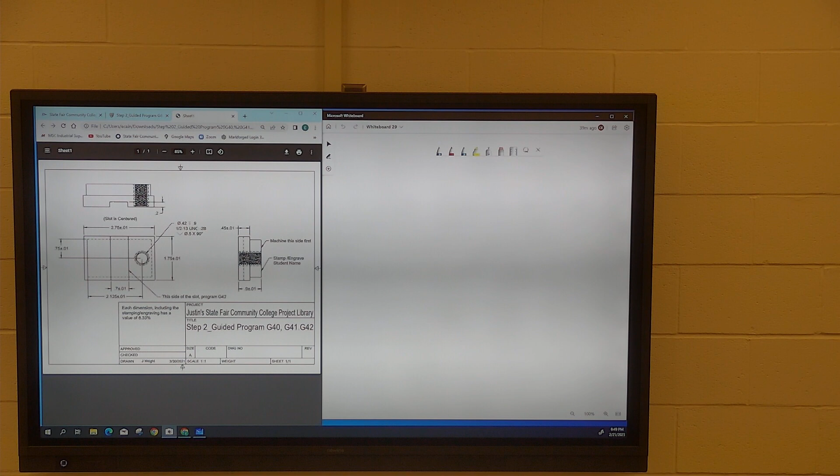Thing that I missed last time. It also helps if you don't teach us on Thursday too. Yeah, that gives me all weekend though. To an extent, yes and no. Yeah, but we also have the fact that everybody's tired by Thursday. Right, we're like, we let it go. No, I understand that too. I actually get that. I totally understand the fact of that.

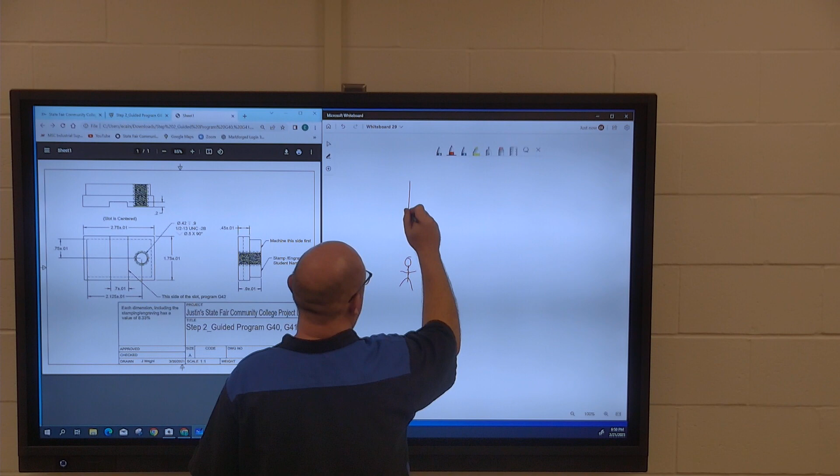So now, remember my little stick person? Let's draw it in here. So if you have your little stick person back here, and you had half of the diameter to that. I don't remember your stick person. So I said the cutter is always traveling away from the operator when you decide if you're in G41 or G42. So this is the operator, the little stick person.

Think of it as a little dynamic thing. And this cutter is on this side. So which one's which? Which code is which? We have G41 and G42. We just did G41, so you gotta know which one looks like G41. They both have arrows pointing in the same direction, though. Yeah, one's on the left, one's on the right. It's more which side of the line.

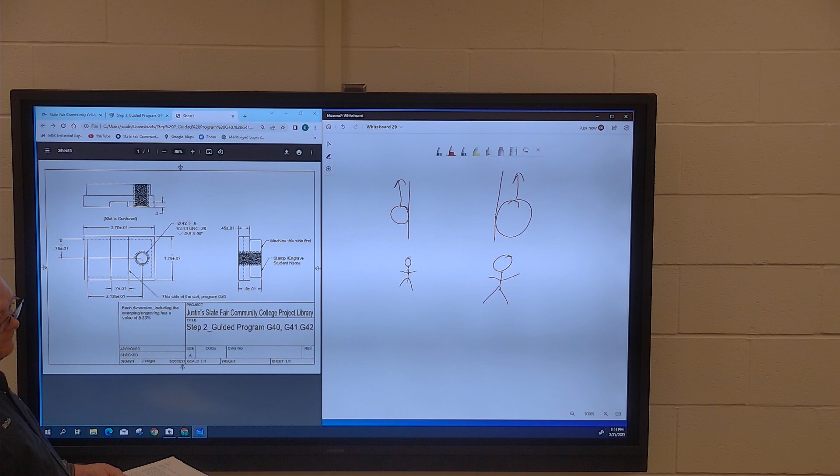You think 41 is on the left? He just said this was 41 and this was 42, is my guess. He actually guessed right. Because it looks like what we just ran. 41, it's more like you're looking at your life, and you hit 42, you're like, oh man, about to hit 50. That's how I'm gonna remember. I don't know how that picks up which side of the line you're on, unless it's because I drew the circles bigger here? How about now?

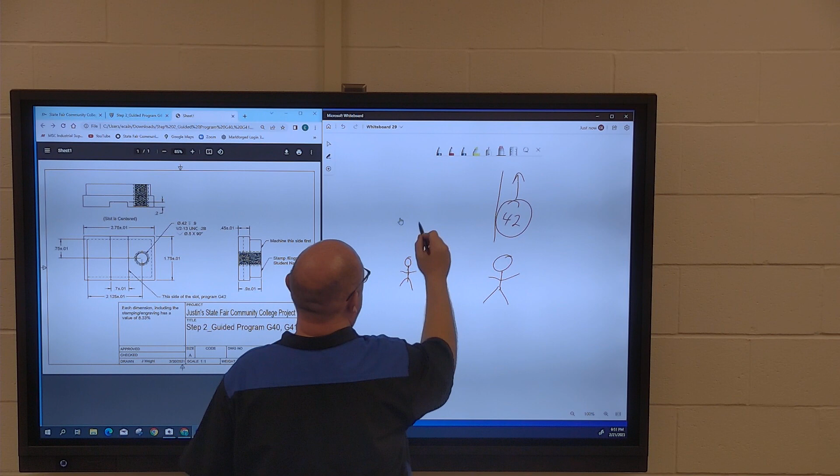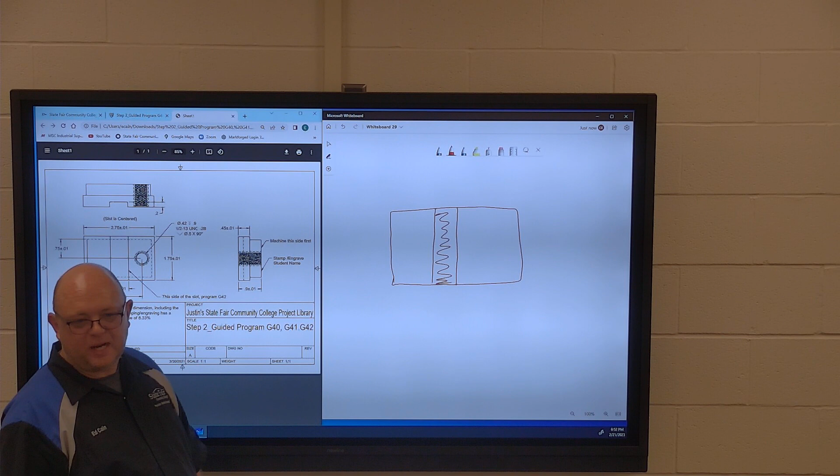And his life just blew up. Yet people at work think I'm unapproachable. Can you believe that? You got written up for that now? Not yet. I've been trying. I heard you say that 3 times now. Unfortunately, people keep trying to approach me. I've had the same thing said about me, Josh. Problem I ran into is, I can figure out the right answer to the problem faster than anyone else. He's just gonna write it down.

So, I want to cut this center part out. Your print says this is supposed to be G42. The whole concept behind this is to teach you guys the difference between 41 and 42. You hardly ever use G42. If you're cutting G42, it's usually conventional. So which one do you want to cut first? Let's see if you guys remember the last class, because this is a trick question, sort of.

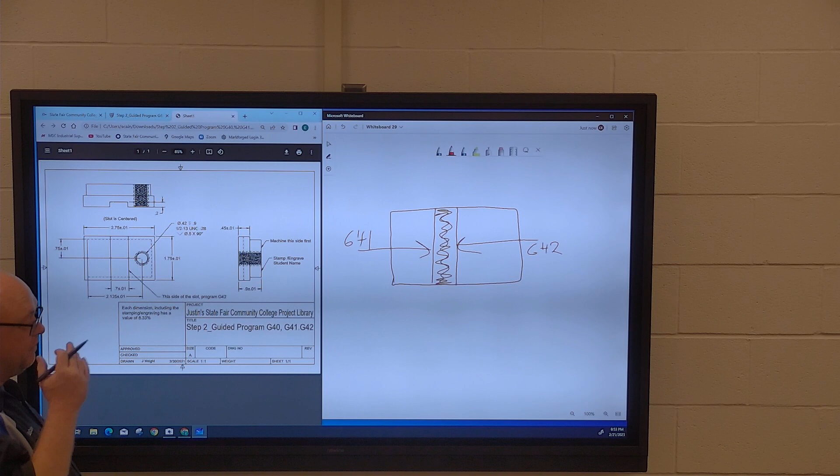Our print says to do it in G42 on one side, and the other side's supposed to be G41. So, I don't care which one we do first, how are we going to do it? I don't care about dimensions, because you've got to start your cutter off and you've got to shut it off. But we can't do a Z move, so unless you stay down and go all the way around, you're going to have to pick up and go back.

Right. So do you remember from last class what I told you to do and not to do? So if I want to start this in a G41, for the little stick person I just drew, I want my cutter on this side. You wanna come down to where your cutter is now and then go up. If you look at G41 in your book, and your little person's down here, your G41 shows like this, because it's on the left side of the line. But I want my cutter to be like this, and I want to cut in G41, so what do I do?

So if you're at the bottom, it's on the right-hand side. What if I start at the top? Will it be on the right-hand side or the left-hand side? It'll be on the right side of the line, right? Right. So if you start up here and you're going this way, according to G41, travel this way, cutter on the left. Seems like you're up there looking down at it.

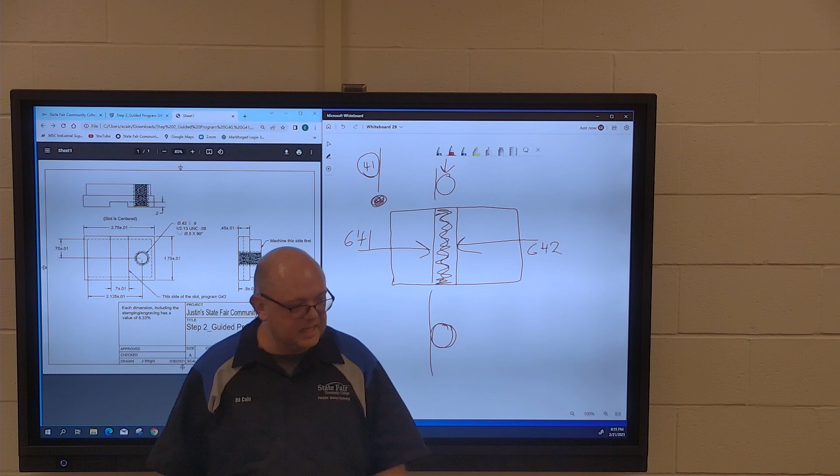Right. So this is what we want to do. We want to do a G41 from up here. And we'll do this. So we have to step in to our cutter, to our line. So we're going to do something like this, and then we're going to come down like this, and then we're going to come back out. Right.

So now how are we going to do the G42 over here? If you had your cutter, we want our cutter on this side of the line. Where are we going to start to get our cutter on that side of the line? You want to start at the bottom where you drew that and go up, right? But G42 is like this. On here, it says right side of the line, right? Does that look like that?

So you want to start at the top, or go back up? You want to pick up, run it Z positive, and go back up over your part, and then come back down? So you want to go like this. Right. Okay, I see what you're saying. So this right here is your G42. The first pass, you go there. And this over here is your G41. This will be your start point.

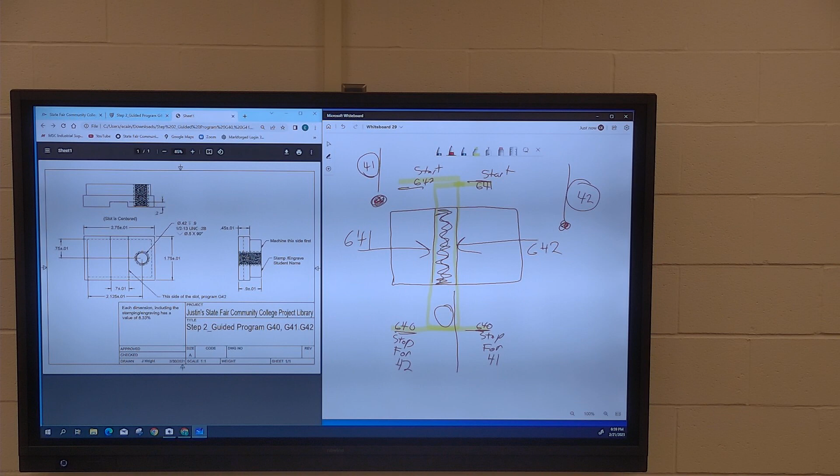So now we know that's what we want to do. So sketch it on a piece of paper, keep it in your brain, because I've got to erase that. Or I'll just roll it up and we'll go on. So now we've got all of our lines laid out. We know what we want to do. So now we're just going to go get dimensions off the print to do that, okay? I'll just scroll this one up, because I didn't screenshot this one. And now, here we go.

So, I have my drawing like this. I have my slot somewhere in here. That's what we want to do. We set our G41 that's going to start up here, come over, go down, come off the part, and come back over here, right? Correct. So the first thing I want to know is, from my 0, 0, where is this? X 0, Y 0 is in the middle.

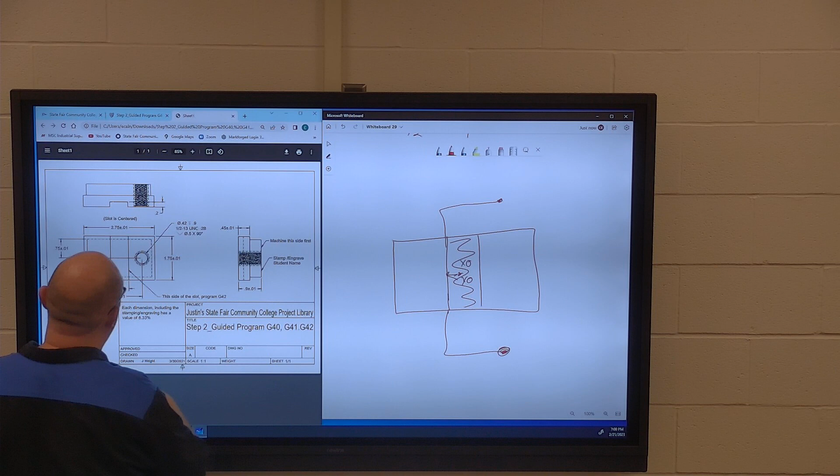So it should be 0.75. No, it should be 0.7, so that slot is 0.35. Is it slot center? So if it's slot center, where's my 0, 0? 0.35. My 0, 0, Josh is right, my 0, 0 is right in the slot. So if the slot's 0.7 wide, then that means I've got 0.350 on both sides. Understand?

So my X right here is going to be what? Negative 350. And my X over here is going to be 350, right? So now all we got to do is worry about how far off we want to be when we make our little target, and then our Y. So if we have a 3/4 inch end mill, technically we only have to be like 800 thousandths off. And I can show you guys how to prove this.

So our part is... And you don't want to do that with a 3/4 inch. No, we use a 1/2 inch for this. You're right, it's a 1/2, because otherwise it's going to cut it way big. 3/4 of an inch. Yeah. Yes, we did a 1/2 inch on this one, that's right. Thank you. So now our dimension is 1.75 from here to here. Is that right? Mhm.

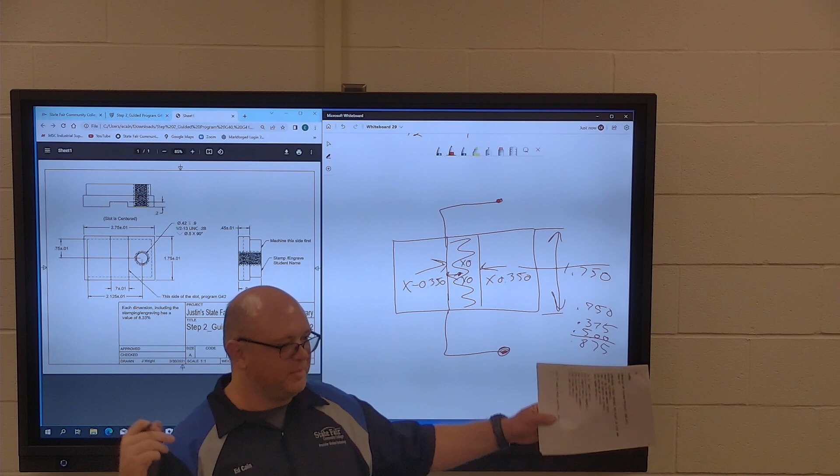I mean, it's like when my wife says something's on sale for $20 and it's 10% off. Or say it's 5% off, that's a better example. So what's the fastest way to figure out what 5% of $20 is? Well, think of it like this. If you've got $20 and you have 10% off, that's $2 off, because you just moved the decimal over, right? So now 5%, you take your 10% divided by 2. So it's $1. That's not a good deal. But you see how I do the math to get there without even calculating?

You can do a lot with just this 10%, because if you know what 10% is, if it's 40% off, you multiply by 4. That's how not normal my brain is. I think like that all the time. Let's get rid of this one. I'm just trying to help Matt think a little easier. Don't make it hard. Keep it simple.

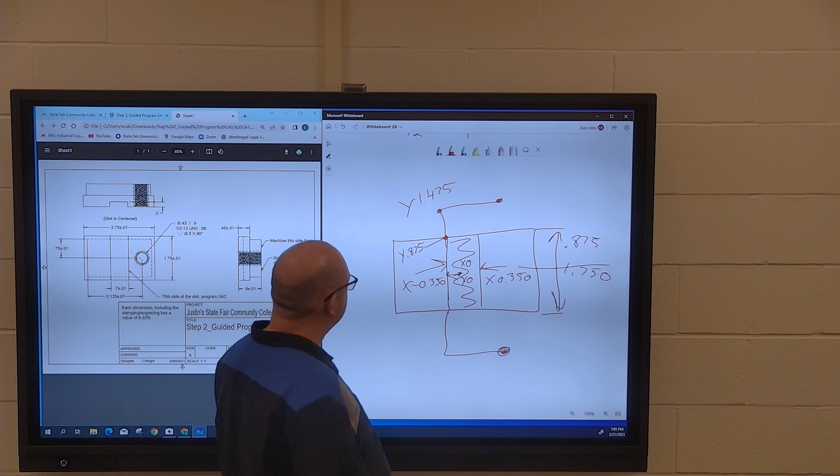1.475. So there's my 14 that he said. Right? Okay, wait, what? You got 600. So you keep the 5, keep the 7. You carry the 1, so you've got 1.475. Oh, so you just add those two together? Yeah. Because you're taking your half-inch end mill, and then you're adding just a hair for safety's sake, which is why it's 600 instead of 500.

Not even in a shop would you cut it right to the edge. I mean, you might leave 2 thousandths if you're running like a billion of these, but we're running 1, so let's just keep it simple. I'm just showing you guys how to get a little closer. So now, my Y over here is going to be Y 1.475. This goes away. So now, if I'm not moving any farther than I absolutely have to, what's my X going to be over here?

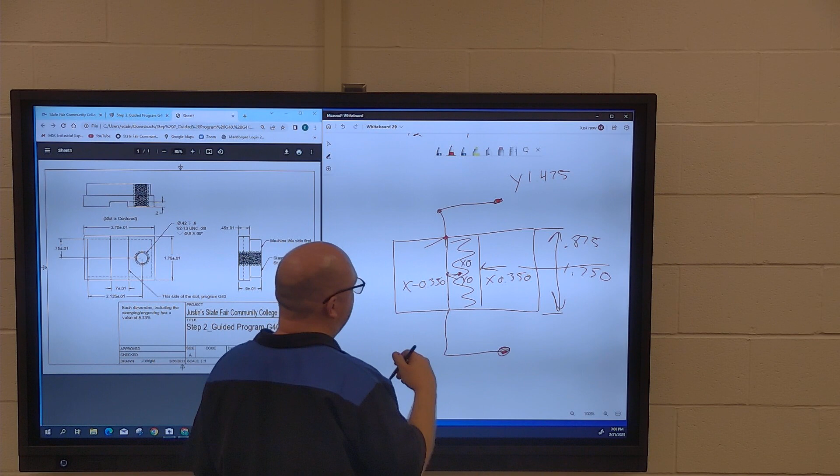So my X right here is this. Is it gonna be 850, or you could do 950, I guess. Technically, we only have to move half the diameter of the cutter, the radius of the cutter, so that's 250. So negative 0.350 plus 0.250 positive means negative 0.1, right? Oh, yeah. That makes perfect sense. Does that help you if I do it like that? So it doesn't look like magic, because this can look like magic, I guarantee it. That's a minus 0.100.

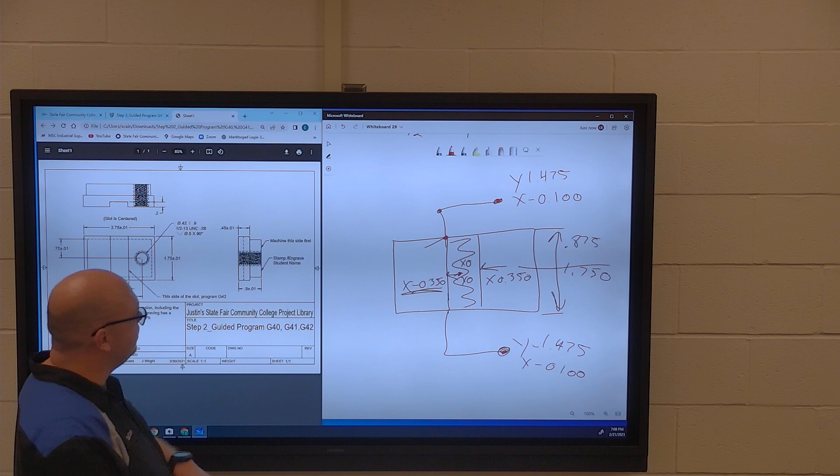No, because I can't pick up and go over that. I cannot do a Z and a 41. So what am I gonna do at the bottom? 40. Turn it off. So now my code is just gonna be, just enough. So now my code is gonna be G, or actually, I messed this all up. I'm gonna do it the same way we've been doing it all semester, otherwise it's right into this crap.

So, here's something else we did. On the second side, I forgot to mention this. That's what it was. So on the second side, usually when we do a second side on the CNC, the first side, Z0 is where? On top. The second side, Z0 is on the bottom, because that sets this thickness. Yep.

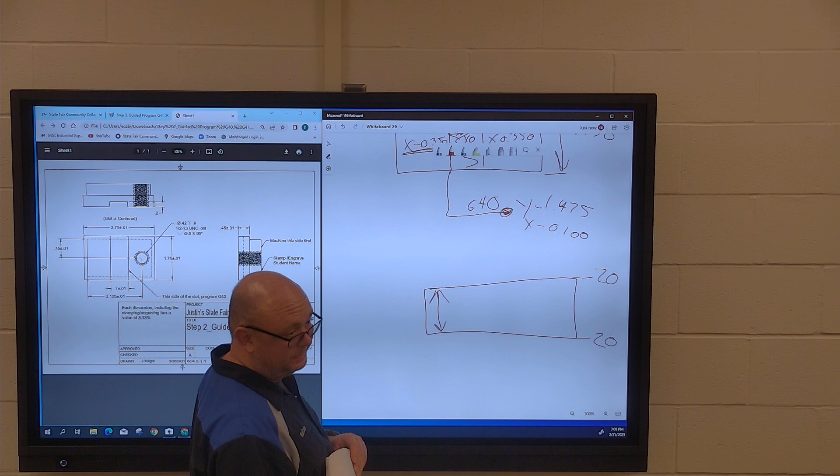You understand? Okay, so I do my first side. So our little slot right here is 0.2, right? Yes. So here's our little slot, and it's 0.2 deep. Our part's how thick total? 0.9. So this is 0.9. So Z0 is down here and not here. What is my Z to cut this slot right here?

Keep it simple, Matt. Don't overthink it. You're right, Josh. Okay. He was asking way back. I wasn't sure if he was asking me or you or just whoever. He said just enough, that's what I was thinking.

Matt, don't overthink it, man, you're making it too hard. The whole thing is 0.9, right? You both agree? Fine, it's right here. Yeah, it's right there. 0.9? Good with that? So the depth of our hole is what? No, the depth of the hole right here. 200. Right. Now I want to know the distance from here to here. How am I going to get it?

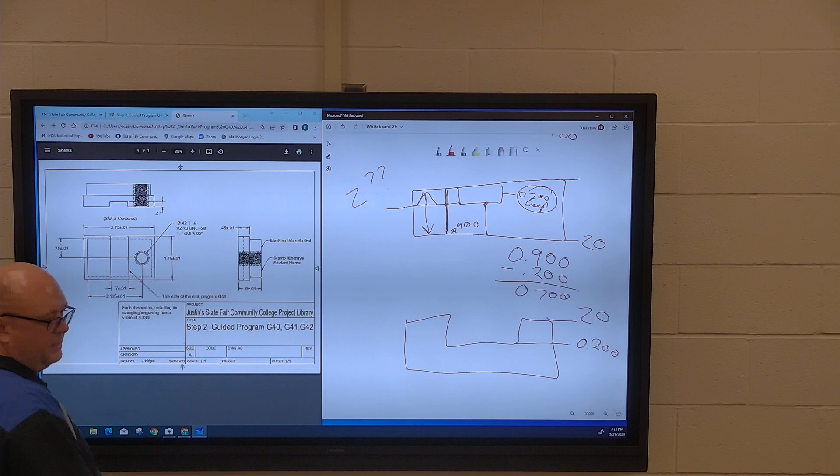So if I told you to cut the same slot from the top, and we're going to say this is 200 thousandths right here. Z0 is on here. So what would my Z be to cut my slot? No, not from the top. He changed where his Z was. See the Z0 is on top? So how far would it go down? Yeah, there you go. So you're saying from here to here is Z minus 200 thousandths. And you're right.

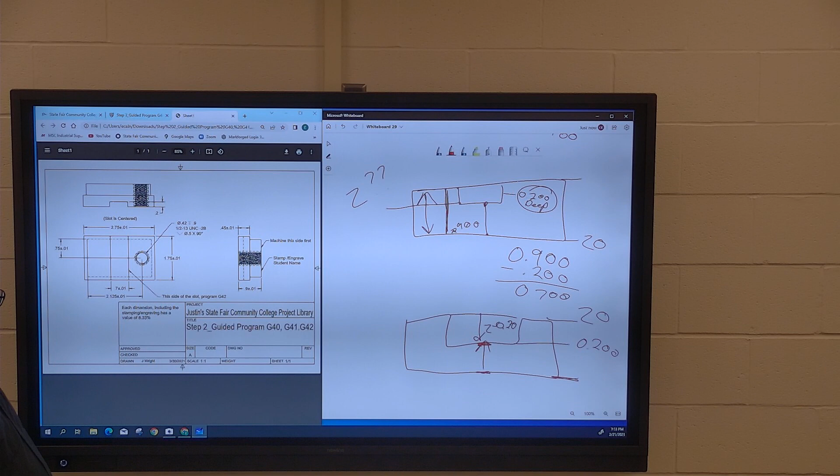Okay, just think of it backwards. Now, if my Z is over here, how do I get up there? Well, you need to know the distance from here to here, literally, just like a print. So how do we figure out that distance if we don't know it? How are you gonna measure a print? Doesn't have that dimension on a print. I haven't seen it anywhere. So, look, right here, what's this, Matt? It's your thickness, right? Of the whole part.

Because I've already machined the top off, I already faced over this one. So if my part's 900 thousandths tall, and I want to put in a 200 thousandths slot, how do you do that? Right, so you subtract this from the whole thing. That's where we got our 700. The whole thing is 900 thousandths, minus your 200, 700. Just like when I go to face mill this part, remember, Z0 is on the bottom. So what's my Z gonna be for my face mill?

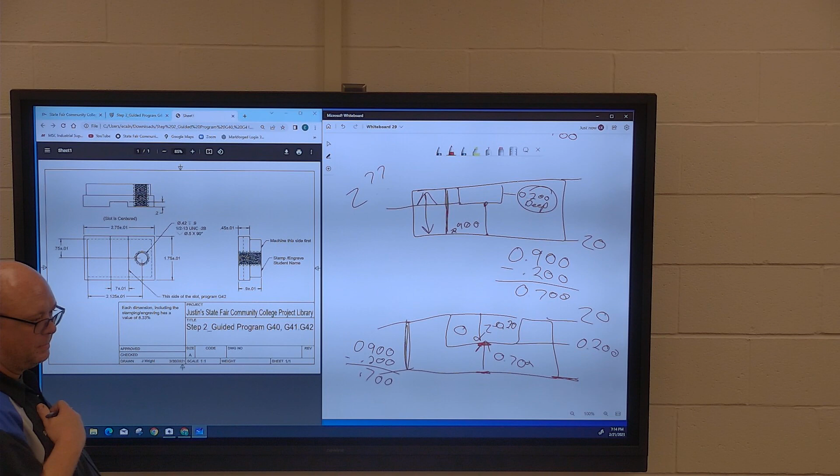No, I said face mill. Forget about the slot. I'm trying to make sure you understand this concept, so we don't need a vise.

Well, it would be the first time. I've been chewed on before. I didn't mean it like that. No, I mean, I could just as easily do, I mean, I've hit the wrong buttons and all this at the place before it happened. So,

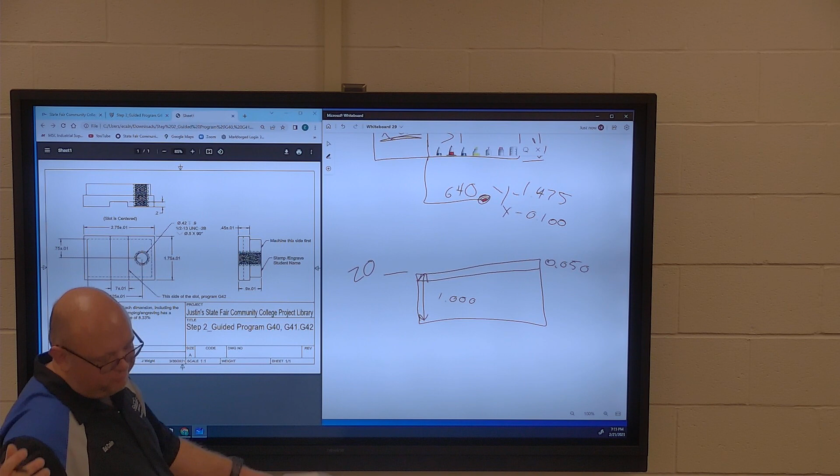Normally, if we're gonna face mill something, we start on the top. So Z0 on the top side is right here, right? On top of my stock. So if I wanna take off, so this is 900, I'm gonna take off 50 thousandths right here. No, this is an inch right now. We want it down to 900. I want it down 50 thousandths. Sorry. No, I said it, I actually wrote it up there first.

You're coming off the top like we always do. So you wanna go down 50 thousandths, what are you gonna type in for your Z? That's just gonna cut right across here. That's what you want, that's what I think. No, I wanna take off 50 thousandths. If you go down 50 thousandths, then it'll be 950, my part's only 900. Take 50 thousandths off both sides.

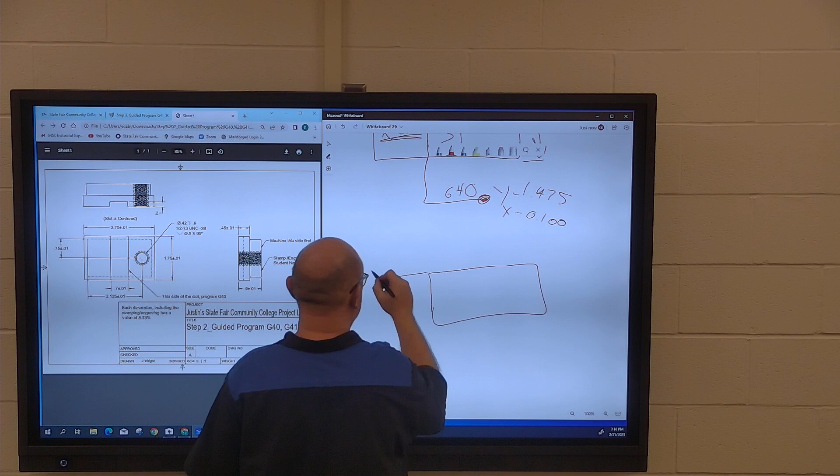Why don't I take 50 thousandths off first? Okay. Let's start. This is 1 inch thick aluminum, okay? My print requires that I have a machined surface on every side. Z0 on side 1, this is side 1. So 100 thousandths. Z0 is on the top. So I have to take off 100 thousandths total.

Well, then that's 200 thousandths, because when you flip it over, you're gonna have to take it off again. That's why I don't take it all, take half of it. So take 50 thousandths. So what would my Z be if I were to take off 50 thousandths? So what's my Z gonna be? It's just gonna be 0.05. No. If your Z0 is up here, you have to go negative and go down. So, yes. Z negative 0.050, right?

And I'm trying to show you the difference. You said that, but we were on the bottom when you said that. So this is side 1, you're on the top. So that takes off 50 thousandths. Now I'm gonna go to side 2. I'm trying to show you the difference, because once it clicks, it clicks, and after that, it's easy. Okay, so here's my block. My Z0 is on the bottom. I want this block to be 950 thousandths tall.

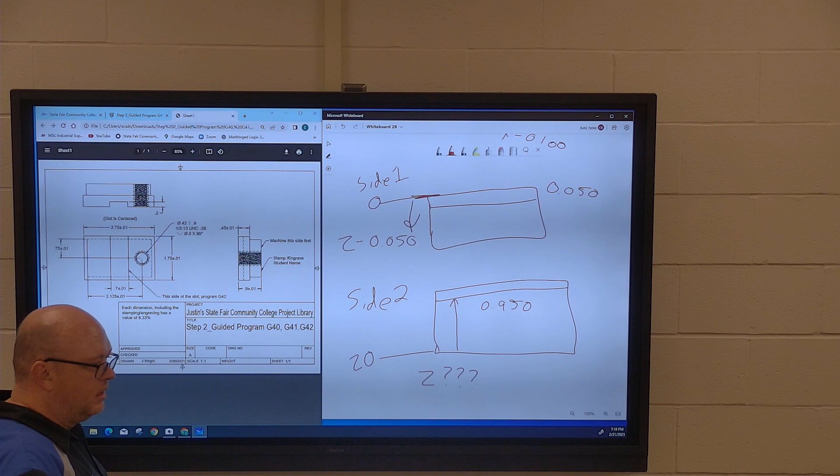So what's my Z on this one? Look at 2 and go down. You do just negative 0. You're still gonna go down. Should be the same thing as that one. Okay, from where my Z0 is, which way is negative 50? Think about where Z0 is. So Z0 is here, and I do what you're telling me. You want to come Z negative 50 thousandths, you're going to drop 50 thousandths from right here, and you're going to go across.

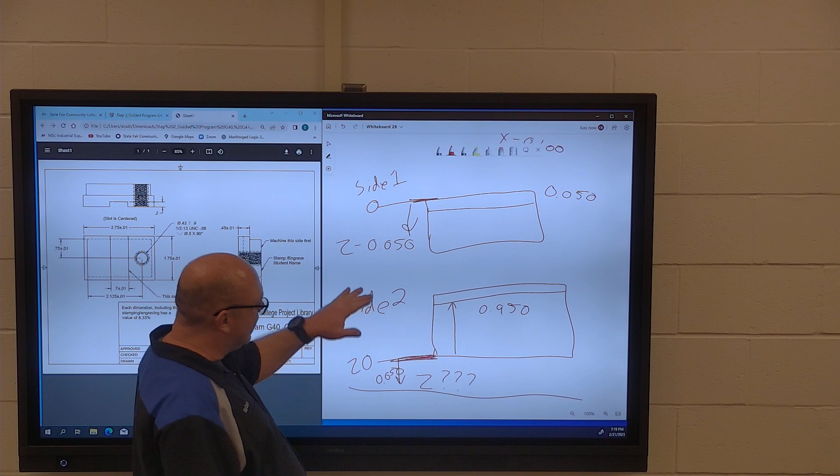So what's it going to cut? It's gonna cut 50 thousandths below your part, because Z0 is on the bottom. I get that, but you're going to flip it over so it's going to have to be at the top. No, I'm saying this is its position once we flipped it. Because this is what we do: on the first side, you put Z0 on the top. Second side, you always put Z0 on the bottom. Almost always. And don't think of the relationship to the part. It's more of a relationship of your program to where the part is.

It's no different than me saying X0, Y0 back left-hand corner, or X0, Y0 center, or X0, Y0 back right-hand corner. It's all the same thing. It's just a picture of where you put your values. The reason it's easier this way is because I want my part to come out a perfect 950 every time, right? And this is why I put it on the bottom, because I know the distance from here to where I want my part to be. Actually, I think it should be 900.

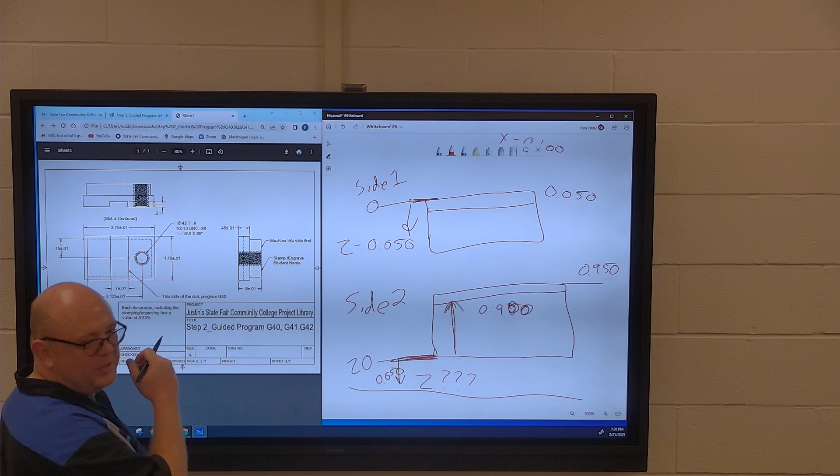So I want it to be 900. We have a 950 part right now. That's probably what Josh was talking about. You figured it out already, didn't you? Well, I figured out what the Z was, but I didn't notice that you had messed up on that little 950 boo-boo. Yeah. So it's 950 now, we want to go to 900.

Zero's here, okay? So anything from Z0 this way is negative. Anything from Z0 this way is positive. So now you're going to cut right here. You're going to have a 50 thousandths tall part. It's just positive 900. So you get your 900. So how far is it from this line to the top of my part?

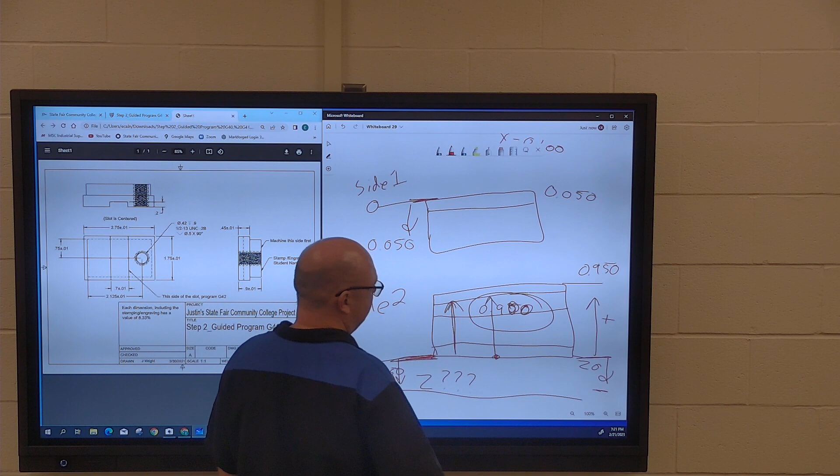So now you're going to cut like right in here. Getting closer. You just said it was 700. No. I just said it was this. It's supposed to be here. That's through the top of the part.

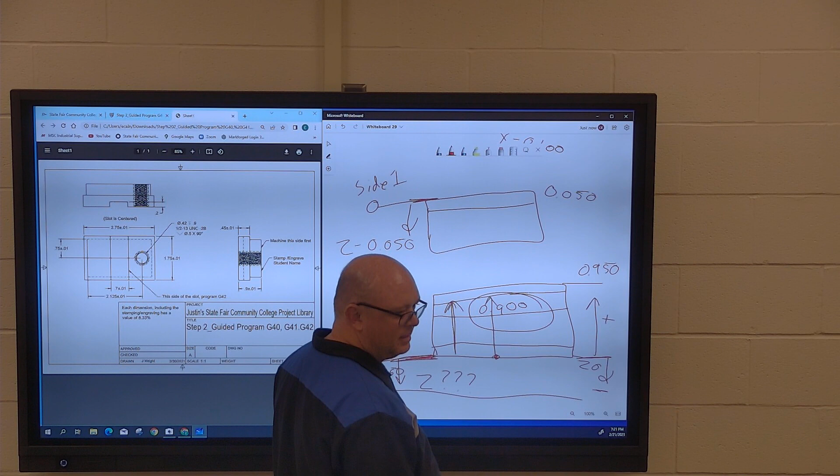So, first side. This is 1 inch thick. No, I get that, I don't know what you would try to do with it though. No, watch this. Because you learn better this way, I think. So, this is 1 inch thick. This is the material we're going to make a part of. It's going to have all these holes, okay? This is a block. So, my Z0 is on top.

On the first side, you said take off 50, right? So now I'm going to flip it over, but when I program it, my Z0 is down here. So in relationship to my Z0, where do I need to be to cut my part down to 900 thousandths? No, I mean, where do I need to be in Z? No, Z is my hand. And I want this to be 900 thousandths tall. What value do I put in for Z, if Z0 is the palm of my hand? Then you're going to cut it like right here. You're going to leave 50 thousandths on your part.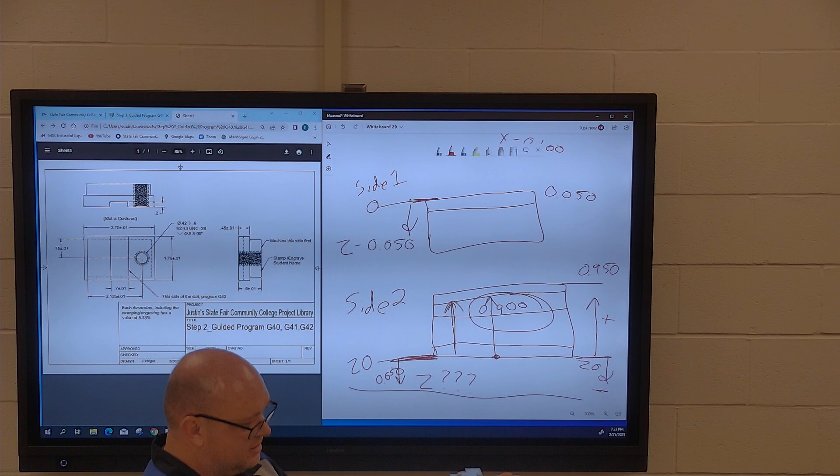I just took the top off, this is the second side. I don't care about second side. That's the first side. 100 thousandths off? I think 100 thousandths off. You just said, take off 50s, and then you go up positive 50s. The first side, Z0 is on the top. So we're just going to touch probe off right here. We're going to drop 50 thousandths and come across. It's going to take off 50 thousandths.

When I flip it over, Z0 is now down here. So what is the height of my Z to take off the rest of the part and make it 900 thousandths thick? So now you're 50 thousandths too high. You took off 50. It's 900. You still have to print. That's why we program that way. We already took 50 thousandths off. You don't care about what you took off. That's the way I'm teaching you.

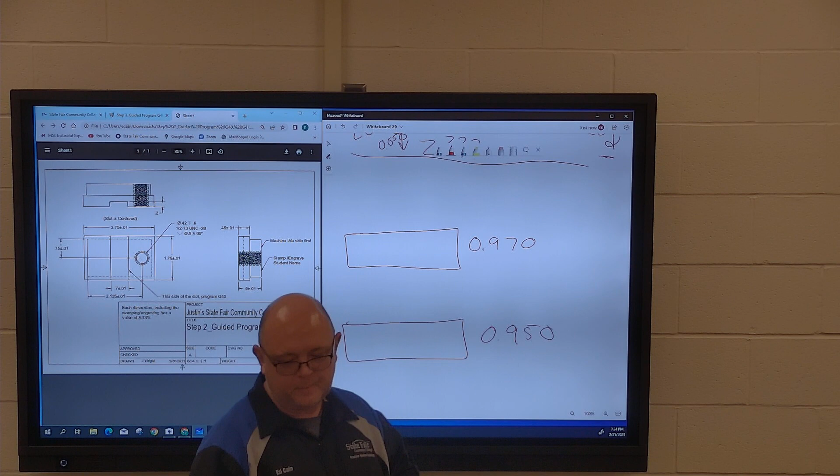So if I put my Z0 on the bottom, and I tell it to go up 900 thousandths, which is what my print says, 900 thousandths for my height, right there, correct? So now, I want both of these parts to be guaranteed with one move 900 thousandths thick. So if I put Z0 on the bottom of the part, which you guys have done before, you did last semester, right? Relatively easy, actually.

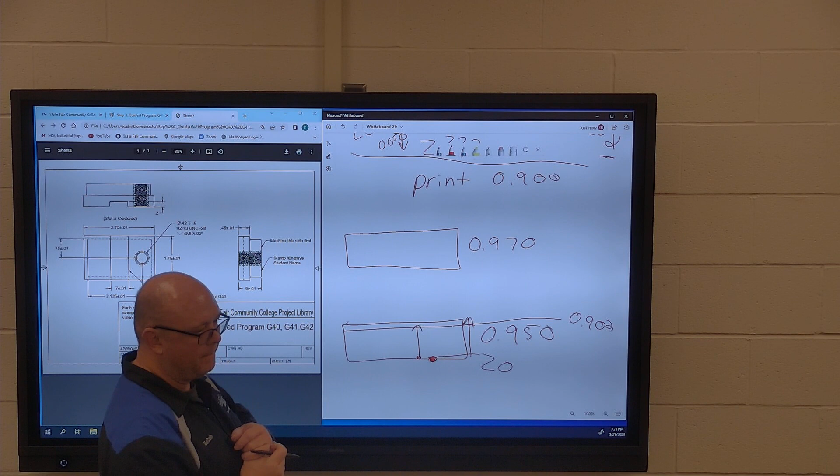So if I put my Z0 right here, and I go straight up 900 thousandths from that point, and I face this off, this is gonna be how tall? Why? Because we're at 950. After I machined it at 900 thousandths, why is it gonna be 900 tall? Because you have to face off the other side. It doesn't matter what size it is, if you tell it to go above the bottom that far, it's gonna cut it right there. That's what I'm trying to show you here.

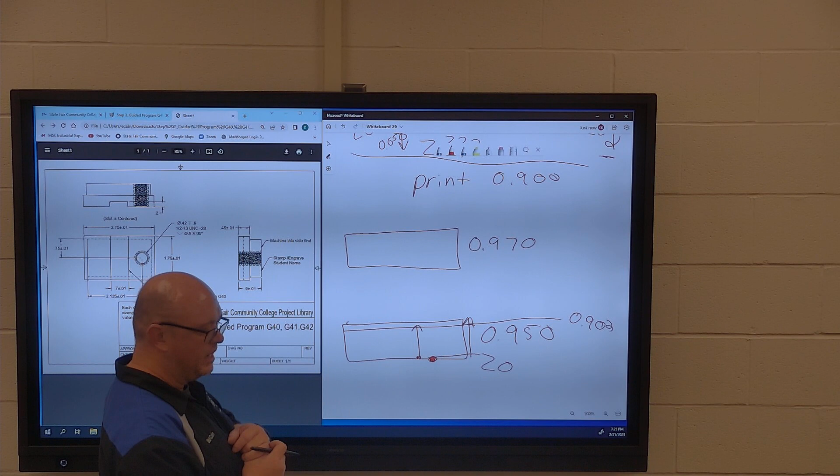So if I take his part, that's 970, and I tell it to also go up 900 thousandths from the bottom, when his part is finished, it's gonna cut right across here, and I told it 900, so from here to the bottom of the part will be 900. As opposed to if you do it off the top. So now we have the same two blocks. You have 970, and you have 950.

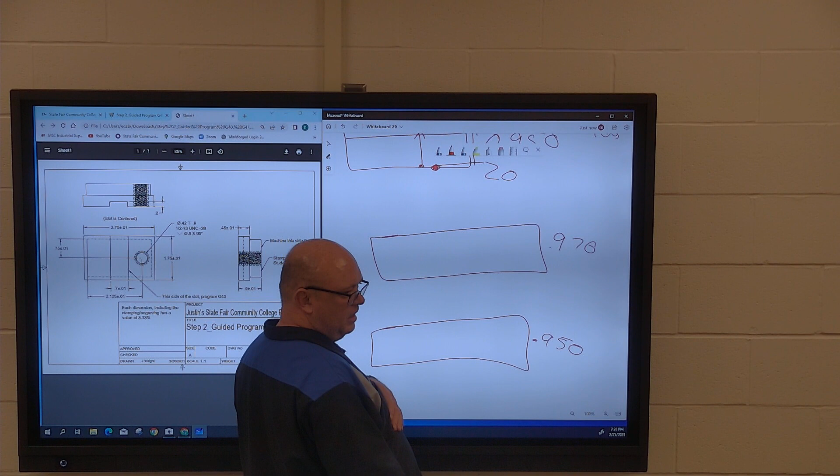And you do it off the top. So you want to take 50 thousandths off the top of both of them? One side, the bottom. What? I want 900. That's what I want. I want the 900 thousandths. No, you've got to split it. No, I've already done the first side. It's gone. Yeah, 50 thousandths off that one, and now I'm gonna take 70 thousandths off.

So how much is left when you do that? 900. 900 here and 900 here. But my way, it doesn't matter if it's 970, 980, 910, 930. So if you program off the bottom, so I've got a block here. This one's an inch. The other side's already been faced off, but it's still an inch.

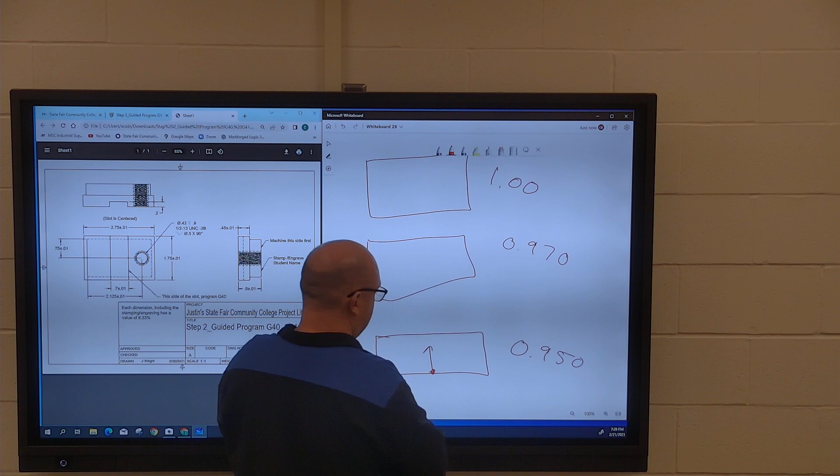I've got a block here, and this block is 970. And I've got a block here that actually came out right, and it's 950. So if you start on the bottom and you go up, I'm going to program, in my program I'll have a Z of 0.900, okay?

Now if I told you I was 900 thousandths above this part with Z0 on the top, what would you think? Slam right into the vise. No, if I said I was 900 thousandths above this part with Z0 on the top, where would I be? Positive, right? So now if Z0 is on the surface the part sits on, like your parallels, and I want to be 900 thousandths tall, but my zero is on the bottom, what do I do?

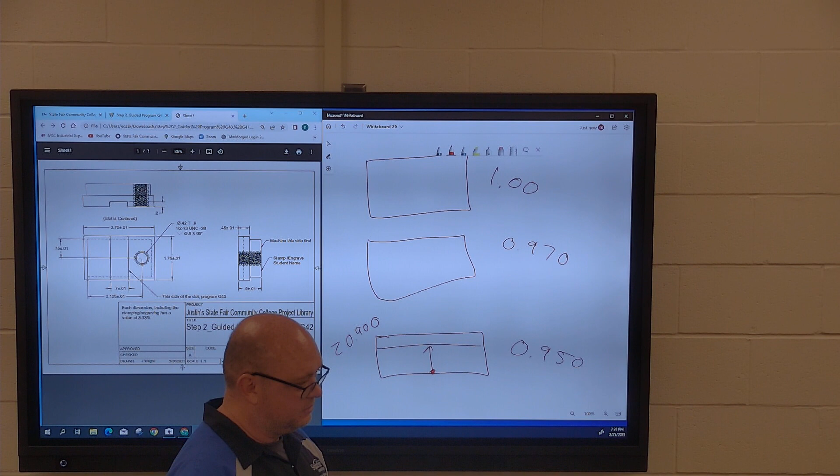So now this is Z0 instead of the part. Yeah, you come up 900 thousandths, right? You come across. So we've got three different sizes right here. I program every one of them Z0 off the bottom. So I program this one 900, this one 900, and this one 900. And then all this variance, I don't care about. It's gonna come out 900 no matter what.

So I don't have to worry about that, right? If you put it on the bottom, you just program the height of the part from the bottom up. That one's easier. Do the first one from the top, just because I don't have to add in all the differences, so it's not so hard to do. So do the first one from the top, and then do the second one from the bottom. That's how I did it. So this one will be off the top, and this is the next one.

Now, however, you have to watch your part. If you flip your part over, like that part right there, it's got a 250 thousandths wide notch on each side, so your part's gonna drop in by 250 thousandths. So actually, the face of your part will be whatever that step is under the parallels. So you have to go off of a surface that's not gonna change. That's the only thing you have to watch.

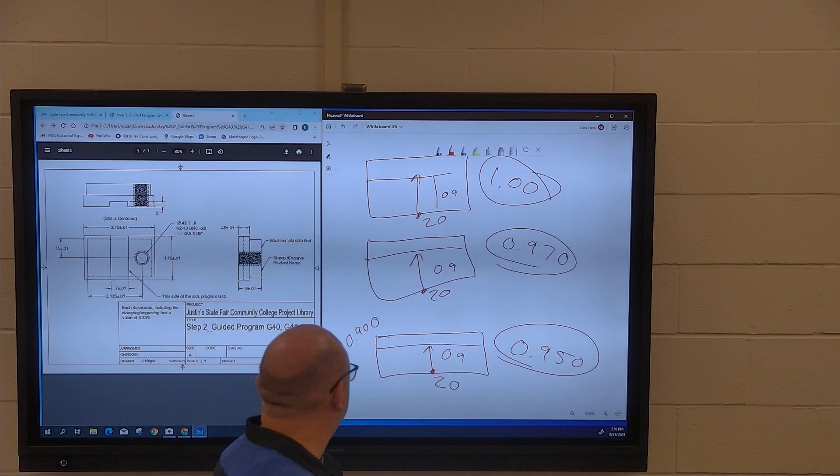So, like that part you're looking at right there, this is the side view of my vise. My vise is going like this. Okay, here's my parallels. That part has a step on it that's machined into it. So when you set it in there, it's going to sit like this, and then the rest is sticking out like this, okay? So this is all part right here. So now your Z0 is actually below your parallels.

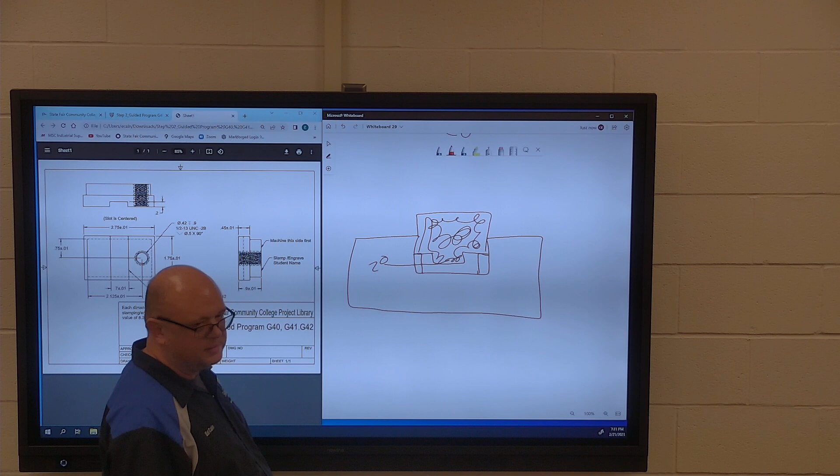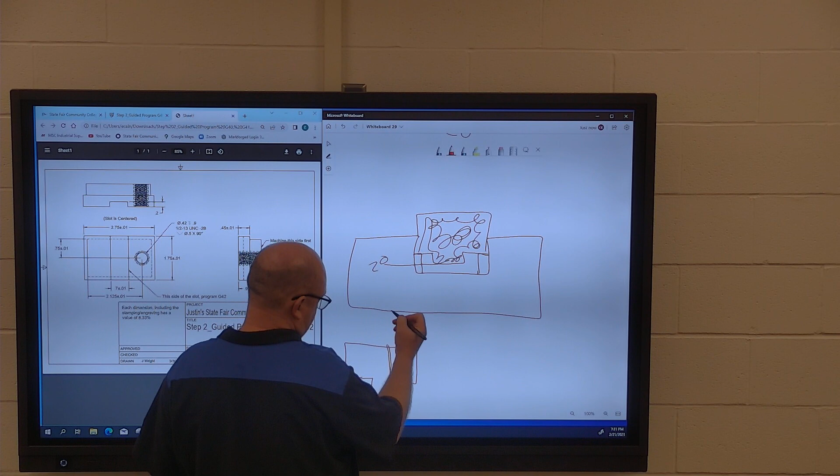But that's so easy to deal with, because I told Josh last time he did it, you measure your part. So if my part is shaped like that, it would be shaped like this, correct? Sort of. Follow? So if you measure this height from here to here, say it's 980 thousandths. So here's the top face of my part.

Put your 980 thousandths on top of your part, from the top, and then do a Z, and then go to your Z offsets and subtract this number. That's where my Z0 is now. It's right here, right at the bottom of my part, because I just took off that whole thickness.

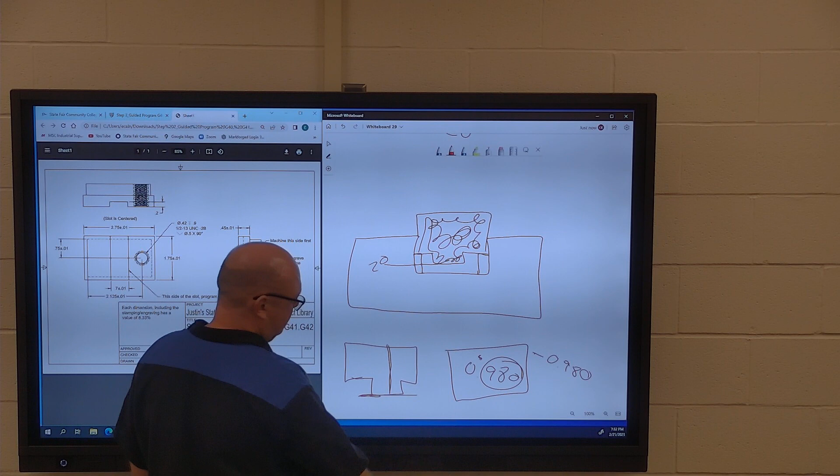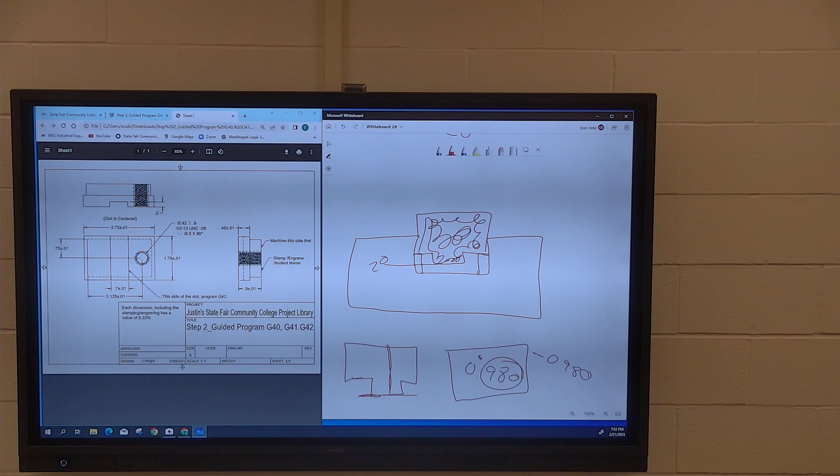Okay? Yeah. Write that on top of your part, the side that's going to be face up, in case you forget, with Sharpie. And then once you touch off on your top, you take the number you wrote on there and you subtract it in your offsets. You don't even have to do the math. All you got to do is minus blah, blah, blah, enter. Because it does the math for you, right?

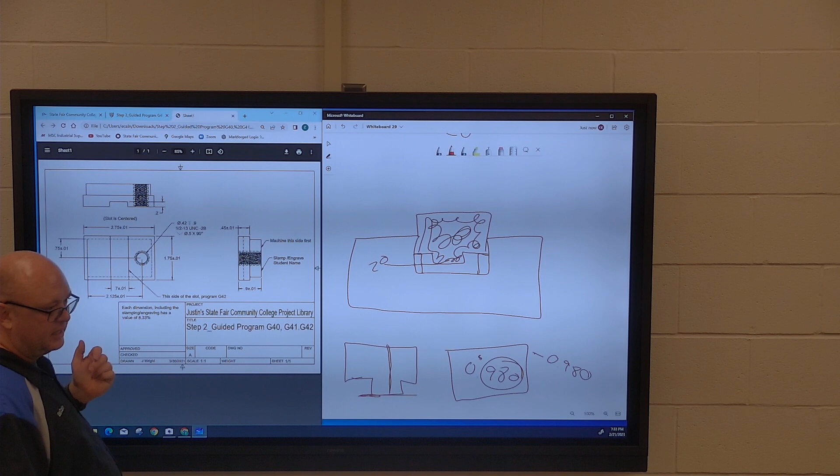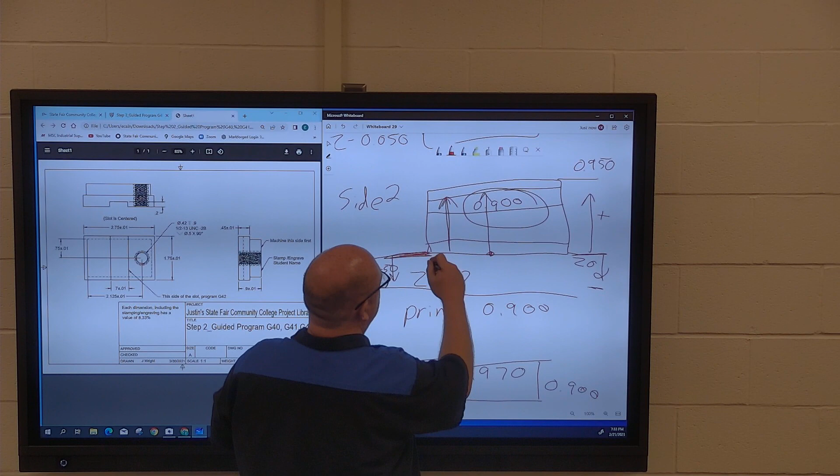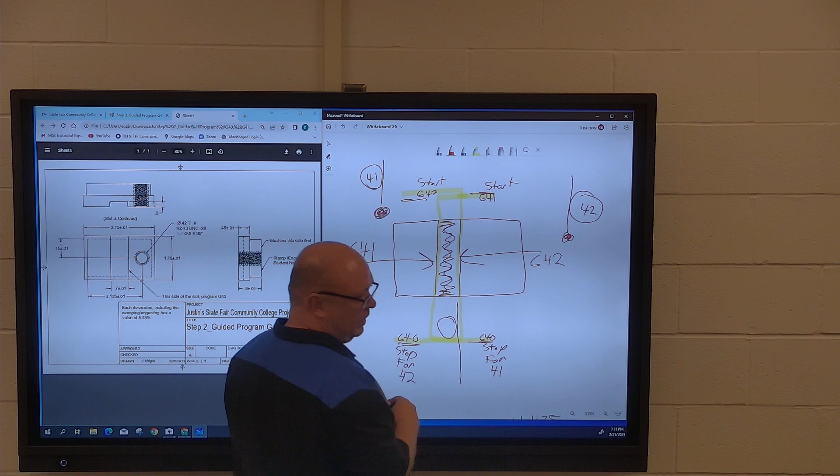Josh, I see you're good. Yeah, I get the Z0 thing. And I remember doing some of that last semester too, when we'd have to flip parts over. We'd have to adjust for our zeros changing, the Z changes. Because when you're working in a place like Gardner, it's the best way to do it. Is it? Because it takes all the error out of it if you do it.

First part off the top, that way you can control how much you take off the top, so that you know you've got enough left to do the next side. And the second side on the bottom, so that your part comes out perfect. You understand why we do it that way? It will come out perfect.

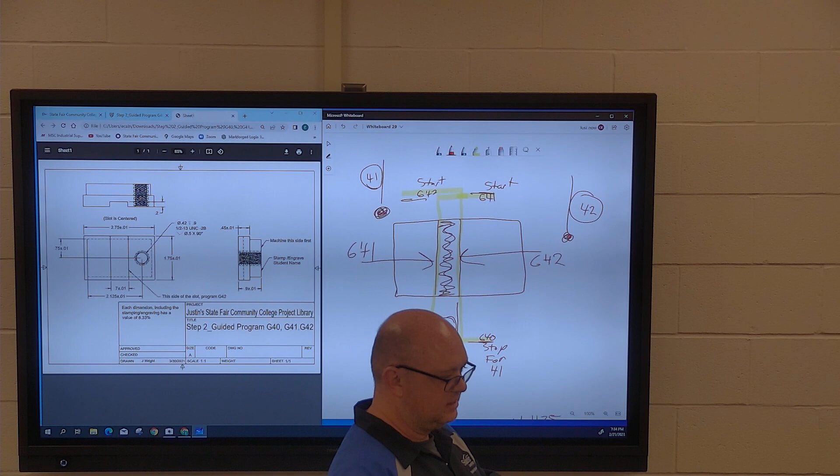So, there's how we start and stop. Here's your code. It'll be on the camera.

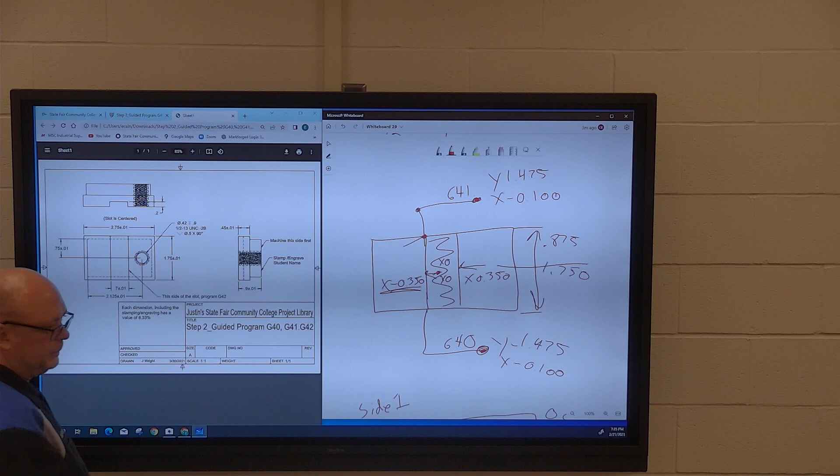I'll get somebody that doesn't come here and say something I want to put on YouTube. And then we're going to get rid of all of this so I can go ahead. My computer just died. Okay. You can go grab a charger. That's okay. Right at the beginning. No, not really.

And I did have a question. How do we locate the hole off the center? I'll help you with yours if you need. I'll help you with the location. This hole or your hole? This one. It's the same thing, I just need to know the process. So, I got you. Like, how do we find X0, Y0? Let's program this so we don't mix up everybody's brain. And then after you do that, remind me, and I'll show you. Okay. Yours is actually worse than this one because your slot's not in the middle. Right, you just have to make sure you can reference everything from the center. Right.

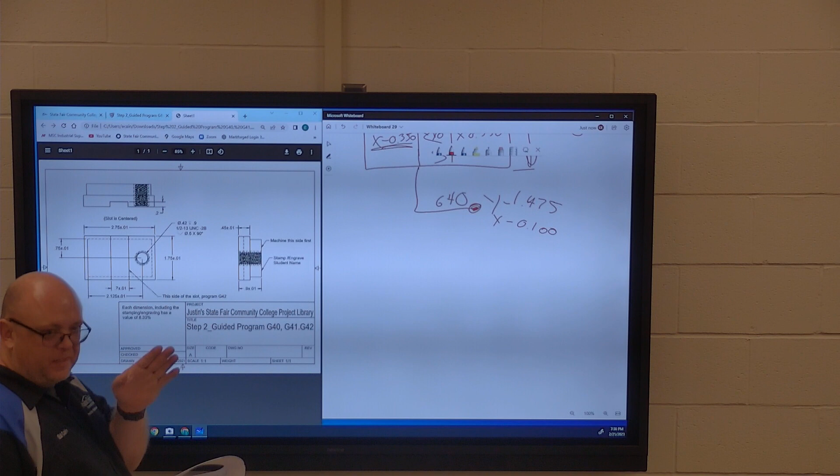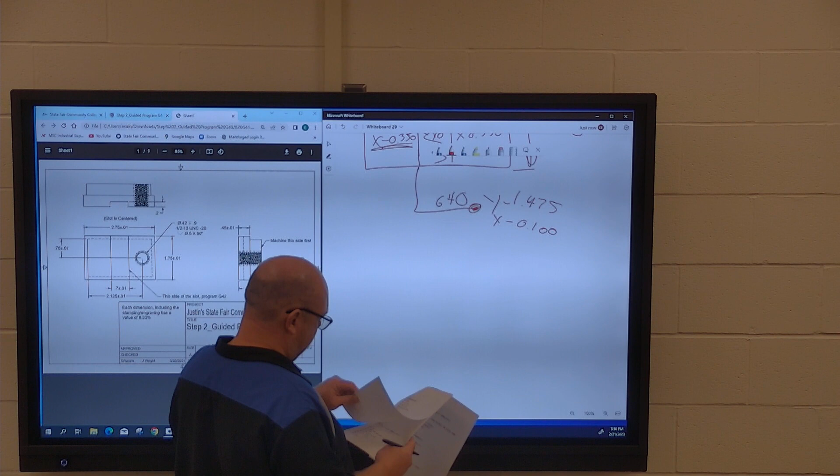So, if I have the right code here. So we have our mill, we're getting ready to do our slot. My code says tool change, and it says use tool 4. Now we've got our G0, G20, and all that other stuff that goes behind it. M3, S of, let's do something crazy, 12,000. Technically, we can't have a comma.

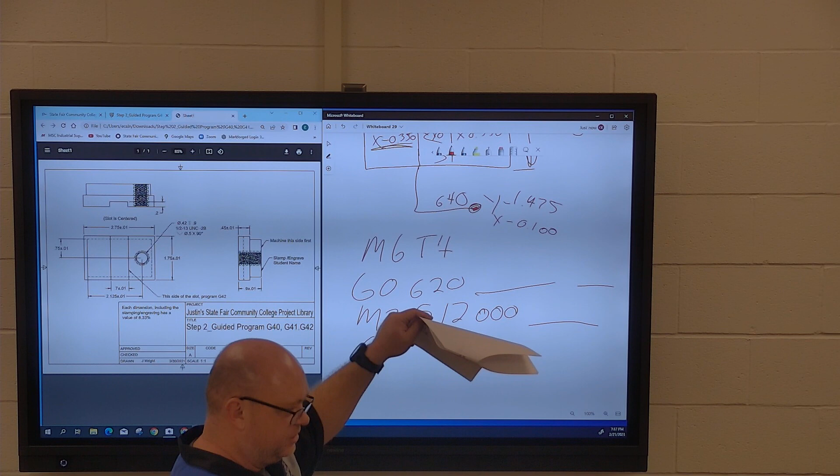So now we're gonna do, first one was on G54. Now, pay attention, you're gonna get lost. The first one was on G54. So now we're gonna go G55, because that way if you screw up your part, you've already got 2 of the offsets already set from prior. And that way you also don't confuse yourself and forget to change your offsets, or forget to change them back when you go to the other side. That's why I suggest don't use the same offsets. I send to robotics, and when I work with them, they don't use the same offsets ever on the same part. They will go 54, 55, 56, 57, 58, 59 until it's finished.

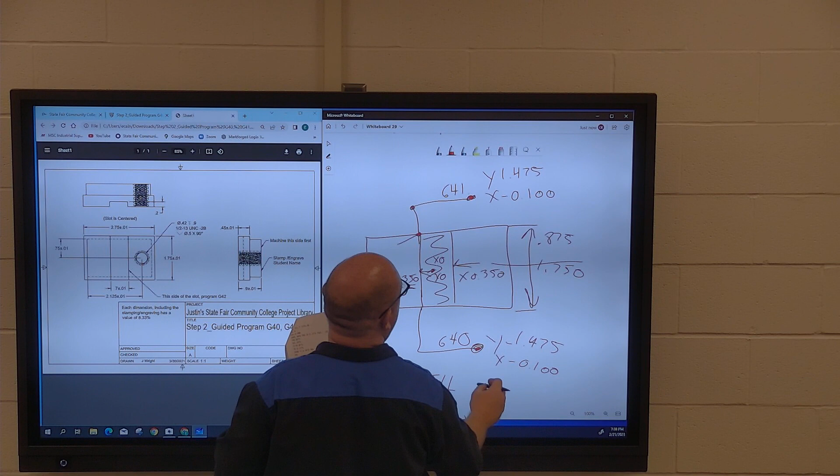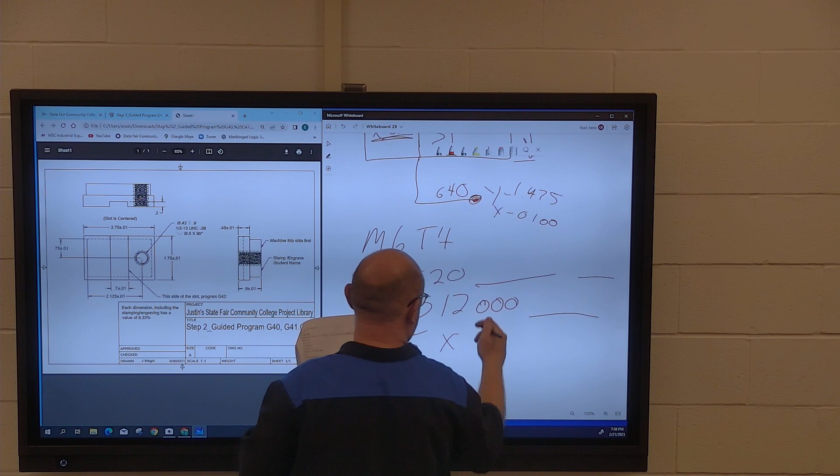There's one part that they ran that I think had 4 or 5 setups. And every setup's got a different detail, a different offset, okay? So, G55, and you guys said we were going to start right here for G41. So X of negative 0.1 and Y of 1.475.

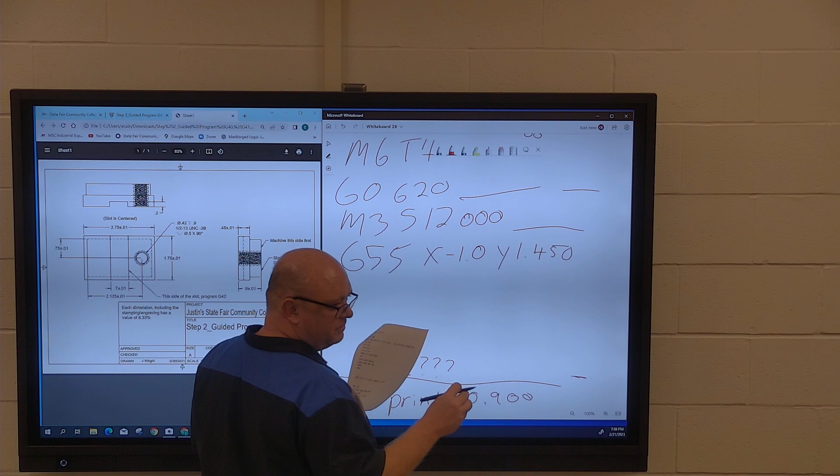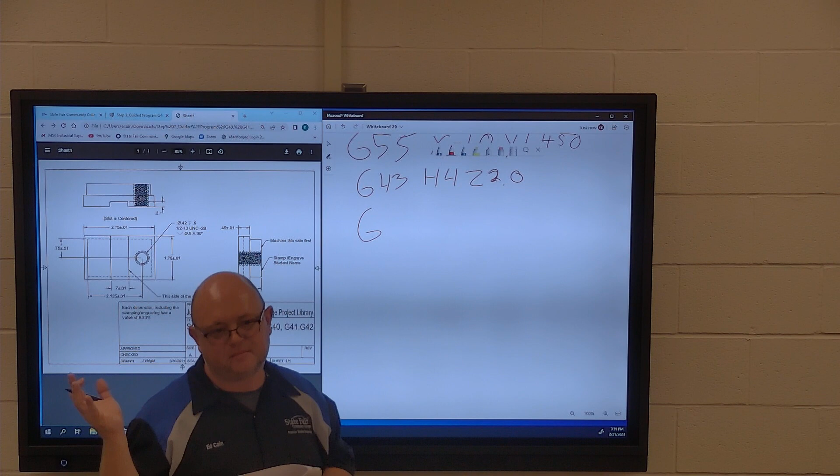So, G43. Now we've got to do a move, so we use a G straight line. G1. Yep. Z of 1.1 with a feed rate of 25. This is just moving our Z down. That's all I'm doing. Z of 0.9. You guys know how you just get closer and closer without giving anybody a heart attack that way.

Matt loves it when you run things fast and he thinks it's going to crash. We about had a heart attack 3 times on Friday. Like, come on, Matt, time for you to go home.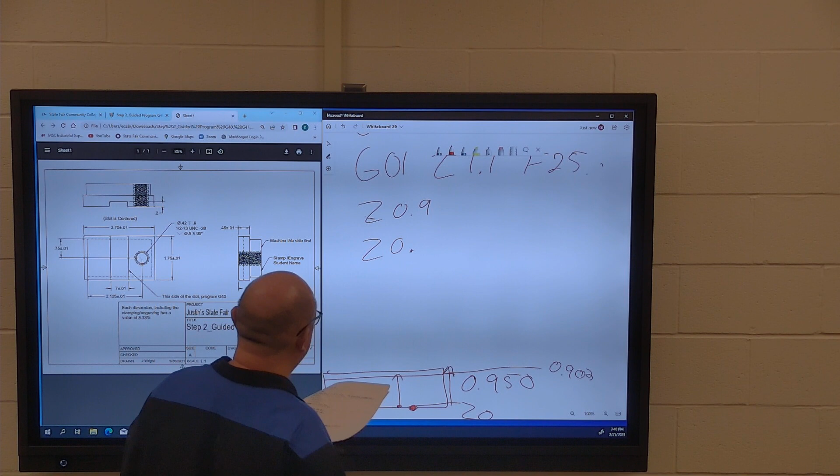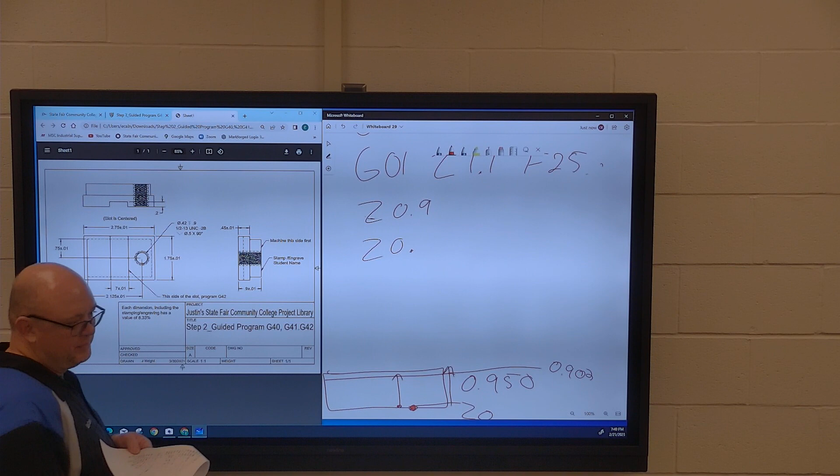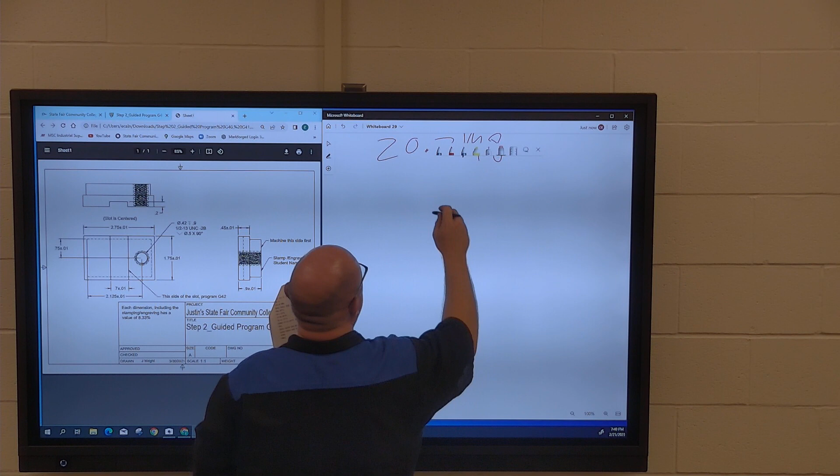Let's get this done. So, we already discussed our final depth. To make this cut, it's going to be what? Z 0.7. Because between the bottom of the slot and the bottom of the part, we've got 700 thousandths. Then turn coolant on. And at this point, we go.

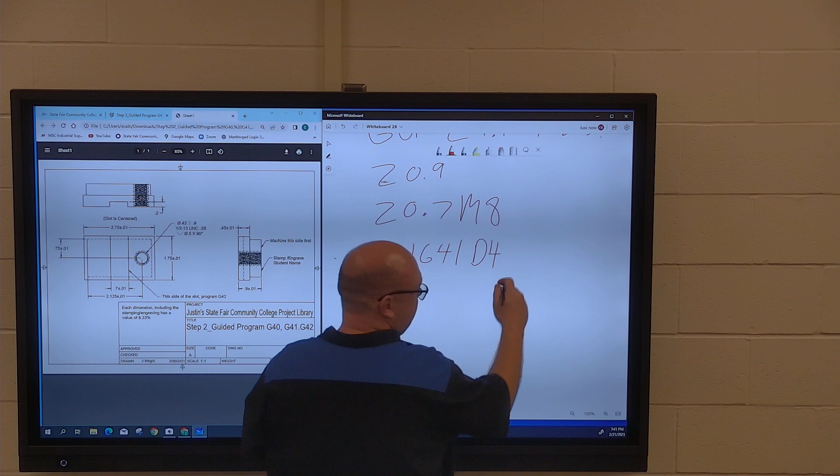So if I'm in the right spot, what's my next code? A linear move followed by G41. G01, G41. Now with that, you need your cutter comp. So that's D4 for the diameter of your cutter. Don't forget your D, it doesn't work right. And then you're going to have an X of negative 0.350 and feed rate of 6. This is what I got. I assume that matches what's up there. I'm not going to scroll back that far because I know this part cut right.

So then from there, we made our little cut, we came across. Now we're going to come down. And then we're going to come back over. That's kind of cool, actually. So, we're here. Now we're here. Now we're going to go here. So my next move is a negative Y 1.875. These numbers won't match completely because we did the dimensions a little different.

The only thing that definitely should match is, this has to match no matter what you do. This is how I tell when people cheat, is if you submit your program and you and Josh have the same random number for Y, little funky. Does that make sense? There's like an infinite number of solutions to that for you guys to both have the same. I mean, if you help me, that's one thing.

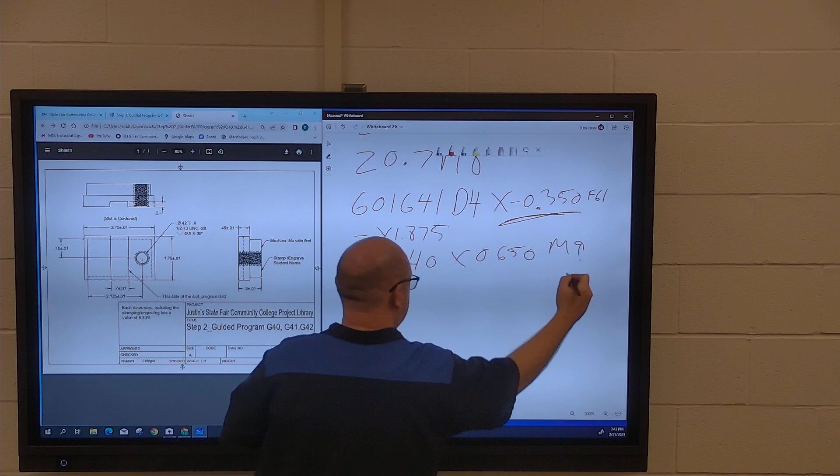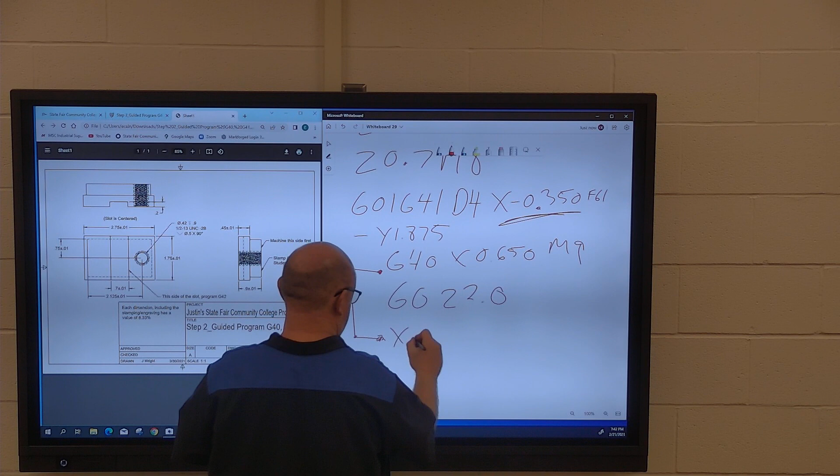So now we have our G40, and we're going to come back over here. So that's X of 0.650, and G0, Z of 2.0. Now we're going to come up. Now we're going to go X of negative 0.650, Y of 1.875. That's to move us back to the starting point to go to the other side and do this move. And at that point, you guys can figure out that that's going to change.

Now it looks like he's as confused as, maybe a little bit more sense. Yeah. Now to Josh's question. You sure you don't want to get yours? I'll put yours up here. Oh, I'm not to that point yet. You guys can tell me what the dimensions of yours are. I was just wondering how I get to the center off of the X0, Y0.

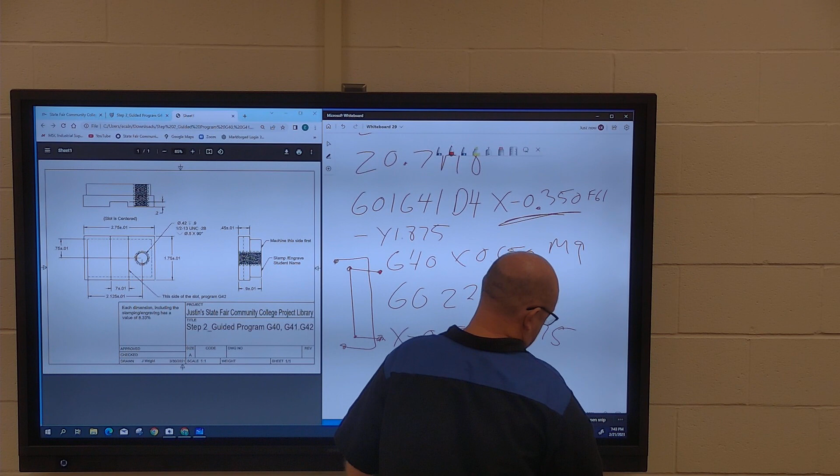So here's why I wanted to wait, because now I can just snip it. Now I can draw it. As long as my snip went this way, not to my laptop. And it didn't go on my laptop, it's right there.

Do what? Nothing. You're fine. No, it wasn't a question. It was just for fun.

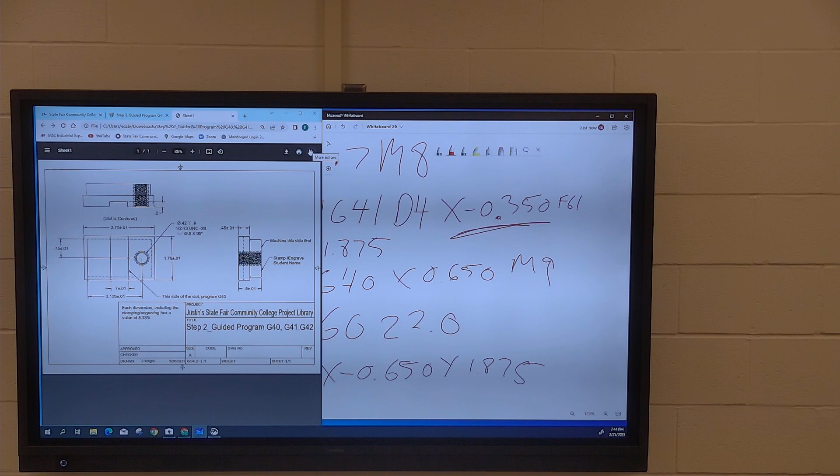I just wasn't sure how to find the center of that hole, so I put it in the right spot from the center of the part. He made it tricky on purpose. I didn't know I needed to change my zeros. So, just looking at it, this is the center of my part. Correct. Oh, it didn't stand it after all. There you go.

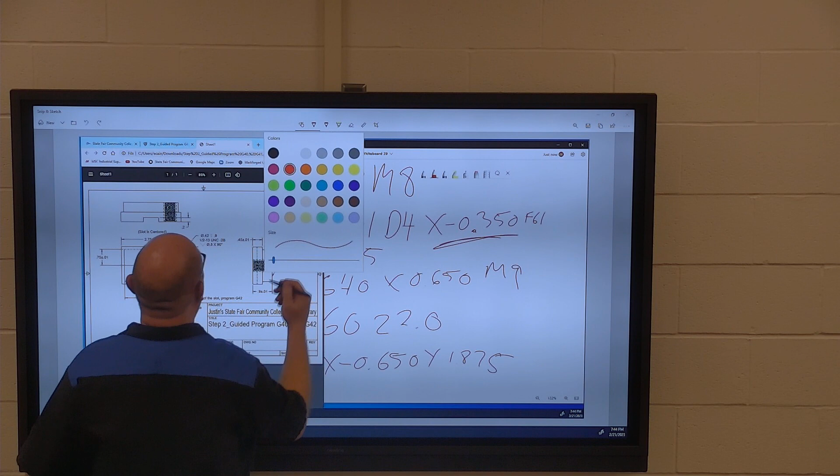I can go. The red's actually not that good. So, your zero's here. Yes. So I honestly don't care about all these other dimensions. Okay. All I'm gonna use them for is for guidance to figure out where I wanna go. Right. So, we already know the edges of the slot, because you said they were half. Correct. So you got that part, you just wanna know where the center of this hole is.

So if you look right here, it says, right, it's dimensioned from the center of this hole, right here, down this way, to the edge of this part, right here. Correct. Probably what I would do is, what is this distance right here? We know what that is, right? No. One there with the squiggly line? Yes, this one right here. Oh, the one on the outside of the box.

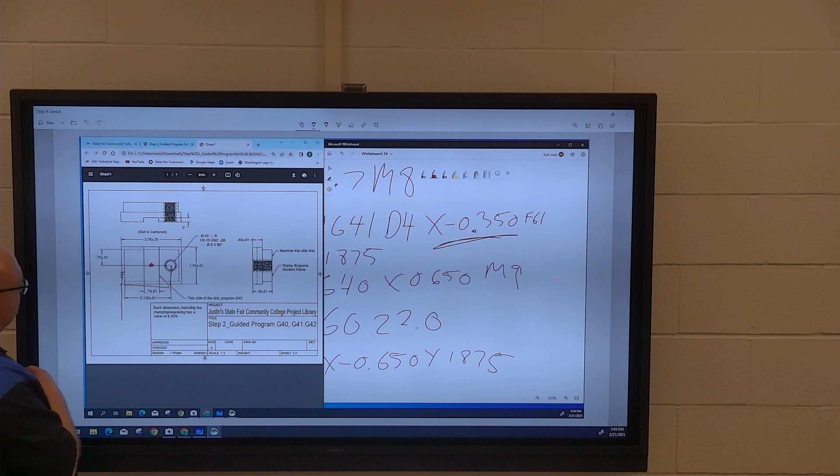I'm talking about from here to this one. Basically that little lip. How long is that little lip? Oh, well, it's centered, so it's gonna be the same all the way around. So if you don't know, you go, here's that dimension, right? Yeah, that's your outside. And then

He didn't give anything for the inside that I see. You may have to put this together with the last one. You do. It's 2.5 and 1.5 on the inside. So it's okay. These are the two prints. This is to give you all your outside info, which is what I need. This gives you your inside, the 1.5 and 2.5. Is that correct?

Oh, wait a minute, though, we already machined the little edge. So all we care about is the outside? This is a hidden line. He did this to mess with everybody, because you don't technically dimension off the hidden lines. Right. So if I know what the outside of this is, then I can take this and divide by 2. So the outside is what? It's right here, 2.75. So if you divide that by 2, from here to here is,

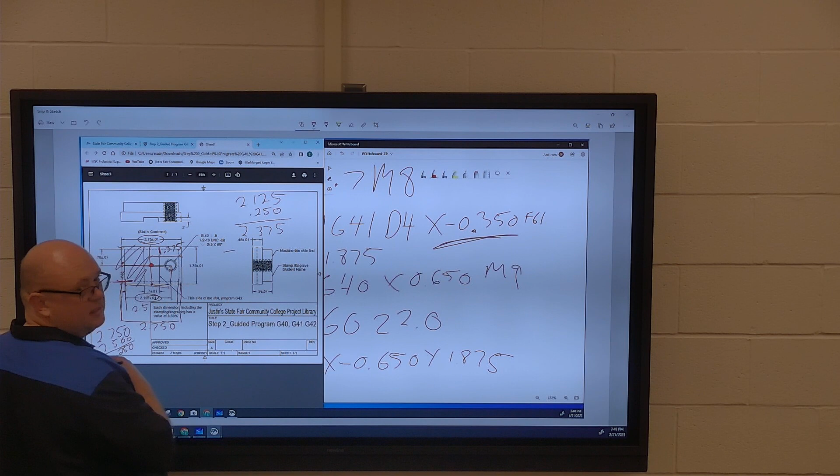No, that's too much. Intentional. Yeah. Justin and I are too smart for you to do that by accident. Okay. That doesn't mean I won't do that by accident. No. On purpose too, though.

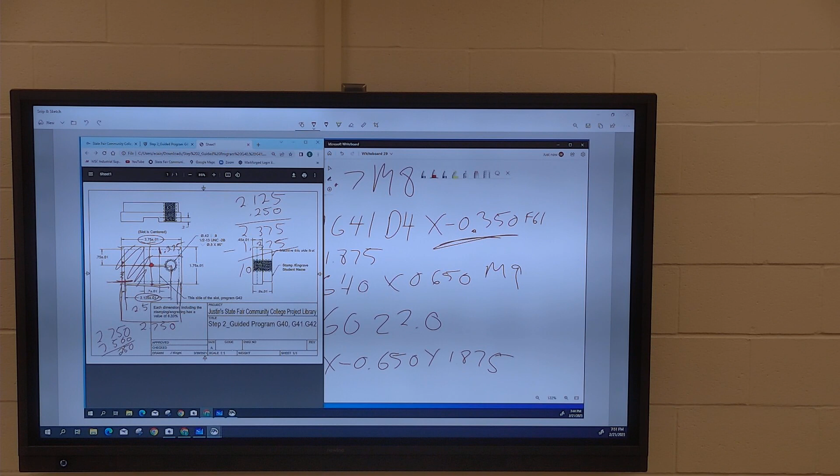Right, I understand. I mean, some of those 111 programs that I wrote don't drill holes deep enough. Some of them don't chamfer deep enough. Huh? I can adjust for that. That's the whole plan, though.